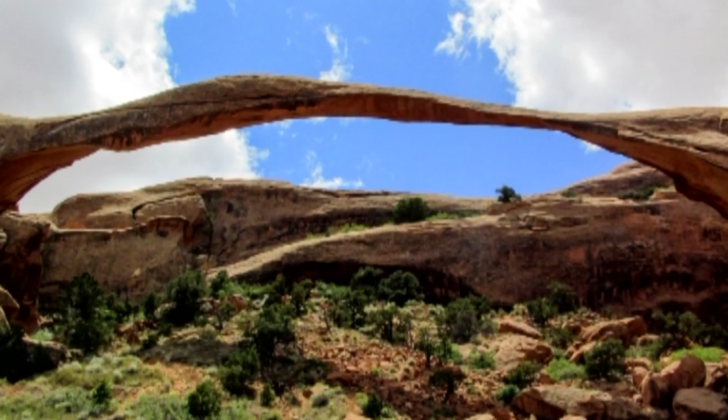From time immemorial, man has been fascinated by structures - structures that floated in his dreams and imagination, patterns that he saw around him, those that he stared at in awestruck wonder when he looked at formations shaped by the forces of nature over the millennia. This fascination inspired him to journey the path of exciting discoveries and challenging innovations, resulting in aesthetic, complex, efficient, yet safe structural forms. Thus, planet Earth was destined to bear on its surface structures that were engineered to perfection.

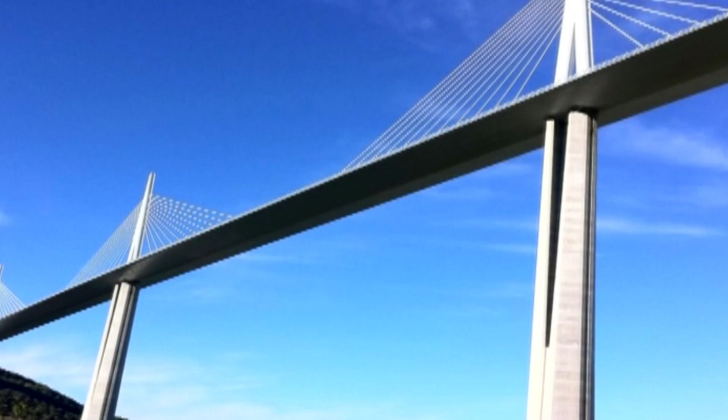The Indus Valley, Sumeria, Babylon, Egypt, Greece, Rome, China - a few of the many places on planet Earth that have given us some of the most magnificent structures. And today, we have breathtaking structures to showcase as a human race that has excelled through this great evolution of thought.

The Council of Scientific and Industrial Research, established by the Government of India in 1942, is an autonomous body that has emerged as the largest research and development organization in the country. It is a network of 38 laboratories and 39 field stations or extension centers throughout the nation. CSIR-Structural Engineering Research Center, Chennai, established on 10th June 1965, is one of the national laboratories under CSIR.

The center is recognized at the national and international level as a leading research institution in the field of structural engineering. The vision of CSIR-SERC is to be a global leader in structural engineering by excelling in research in frontier and cutting-edge areas, and by developing competitive technologies by embracing innovative inter- and transdisciplinary approaches for the benefit of society and industry. The Charter of CSIR-SERC envisages the center to act as a clearinghouse for latest knowledge and expertise.

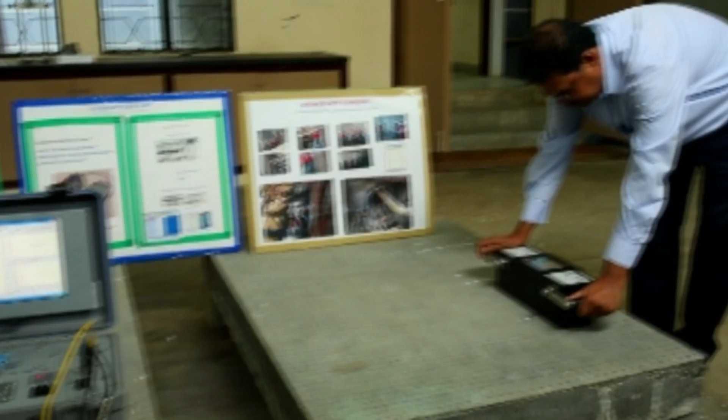The Advanced Concrete Testing and Evaluation Laboratory, ACTEL, has over the years developed expertise in non-destructive testing and evaluation for quality control and condition assessment of concrete and masonry structures.

This is one of the oldest divisions of CSIR-SERC, and for the past 2 to 3 decades, importance has been given to the condition assessment of concrete structures, mostly reinforced concrete structures as well as pre-stressed concrete structures.

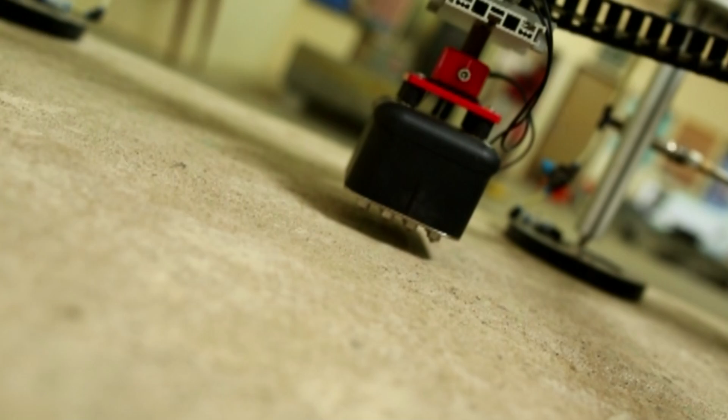Durability studies are conducted on various types and grades of concretes made using mineral and chemical admixtures so as to evaluate their influence on the service life of concrete structures.

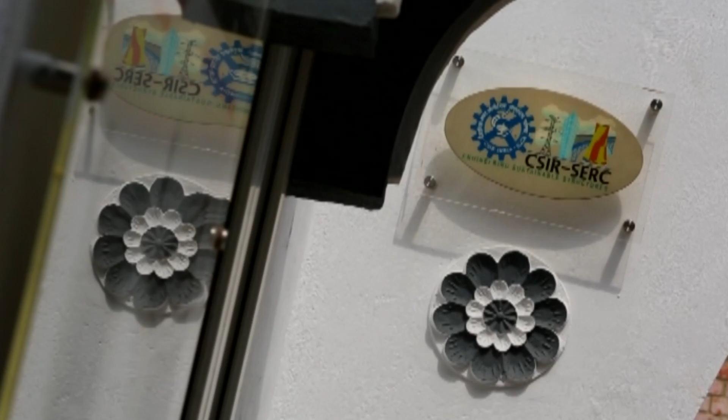It is of little wonder that SERC has succeeded in enabling the construction industry to put up cost-effective structures like they have done in their campus, such as the lightweight EPS model building that can be either a residential or an office space, and model beacon towers such as this one.

Water tanks built with an innovative geometry, saving space and costs. Ferrocement service core units, and fiber reinforced concrete manhole covers.

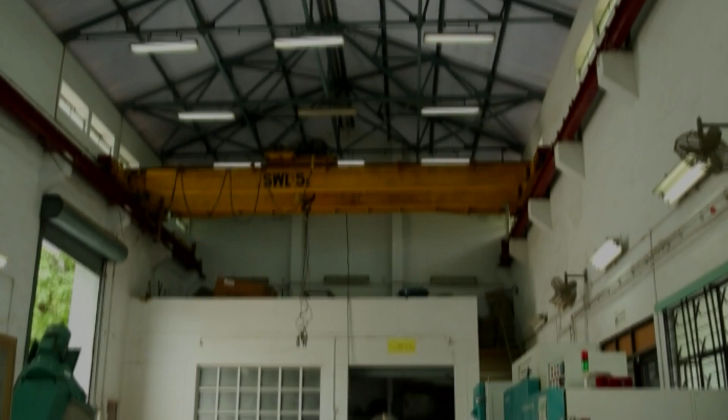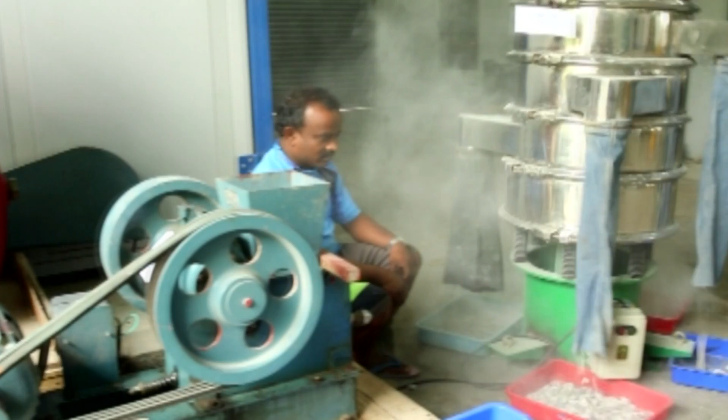This is the Advanced Materials Laboratory, which is carrying out research and R&D activities in the area of construction materials. At present, we are working on alternate binders and aggregate systems, which is required for the sustainable development of infrastructure.

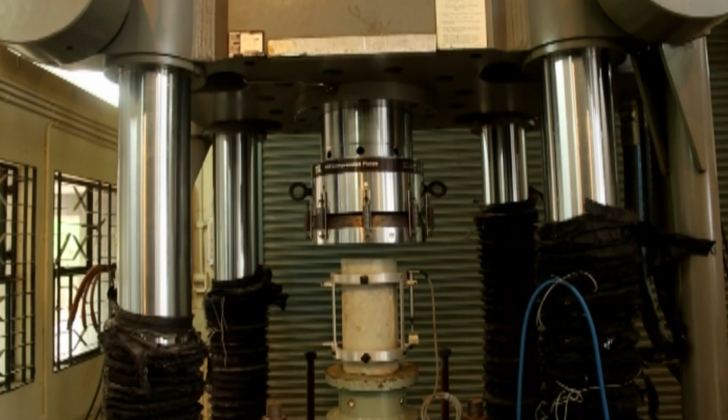Scientists of this laboratory have developed newer construction materials such as ultra-high strength fiber reinforced concrete, high volume fly ash concrete, lightweight concrete, fiber reinforced concrete, geopolymer concrete, foam concrete and self-compacting concrete. R&D is also being carried out for new repair materials and techniques.

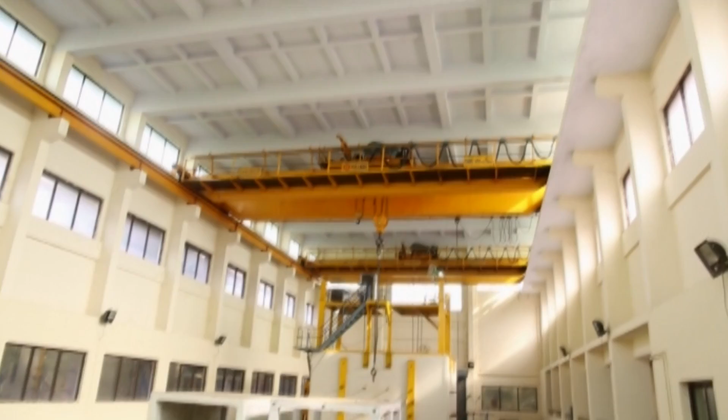The Advanced Seismic Testing and Research Facility, popularly known as the ASTAR Lab, features shake table and pseudodynamic test facilities, the largest in the country.

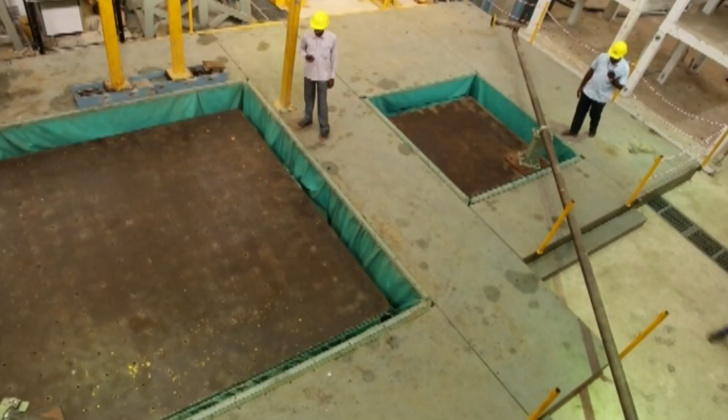In this lab, we try to evaluate the response of structures subjected to earthquake loading. These models of the structures are fixed rigidly to the equipment called the shake table, and real earthquake loading will be applied. Then the response of the structure will tell whether the structure is safe or if any design improvement has to be made.

Many experiments are done in this lab, and some of the experiments are unique and done for the first time in South Asia.

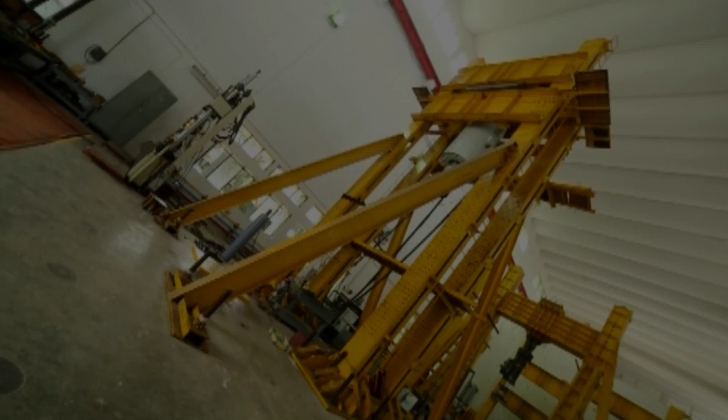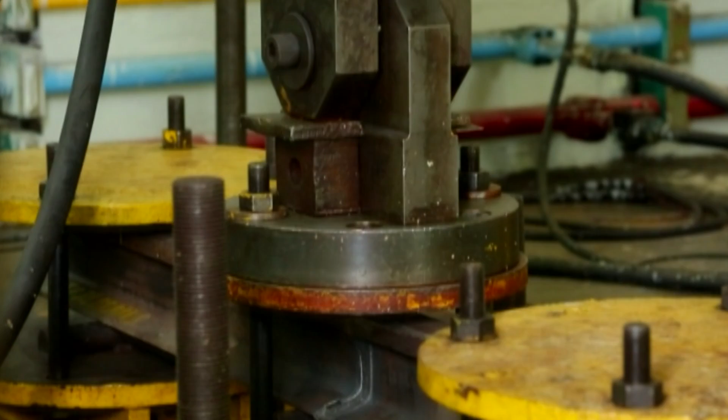The Fatigue and Fracture Laboratory, FFL, features state-of-the-art infrastructure and expertise to study the behavior of structural components and materials when subjected to repetitive loads.

This laboratory was started in 1989, and at that time was called the Fatigue Testing Laboratory. The so-called Fatigue Group was started in CSIR-SERC in July 1983.

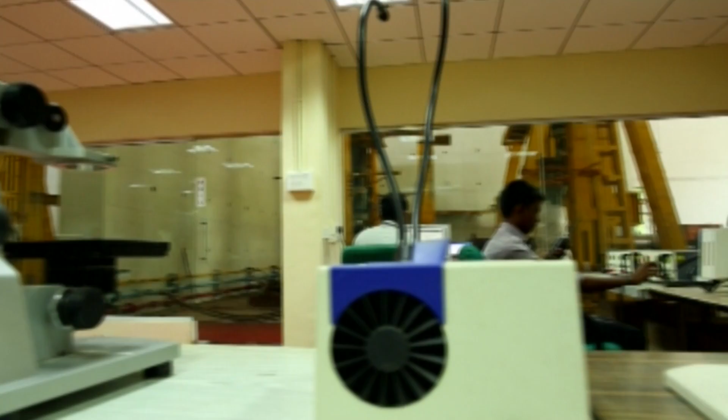The facilities we have can be ranked as one of the best globally for experimental investigations on structural components and materials. Our activities include in-house research and development projects and externally funded projects for the industry in terms of consultancy and sponsored research projects.

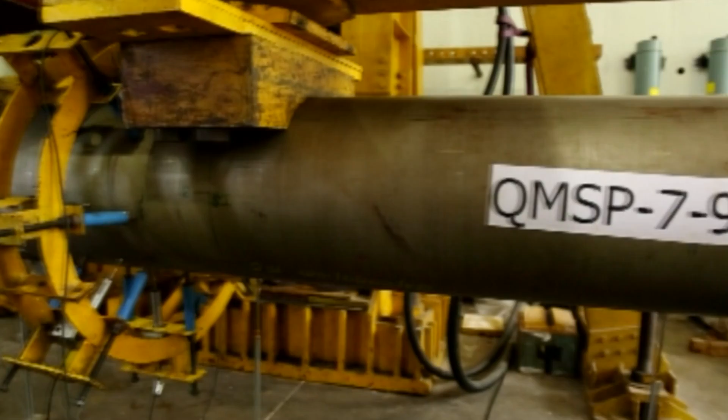Fracture studies under monotonic loading are carried out on weld joints of bimetallic pipes to study the crack growth behavior and failure pattern.

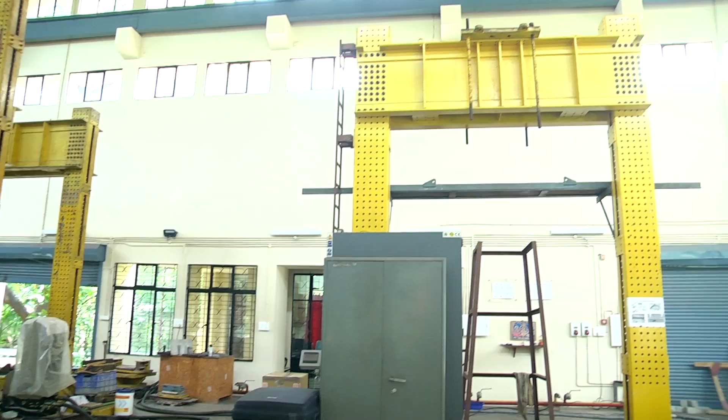In this group, we are working from atomistic modeling using MD simulations, then doing nanomechanics, micromechanics, and then going forward to develop methodologies for structures and to study their performance.

This group is involved intensely in doing analytical, numerical, and also experimental work at different scales. It is basically an interdisciplinary group that takes care of the manifold of structures, mechanics, and sensors.

Here we are using the acoustic emission technique, by which we are also conducting tests using corrosion testing, which is a critical factor for almost all failures in civil engineering structures.

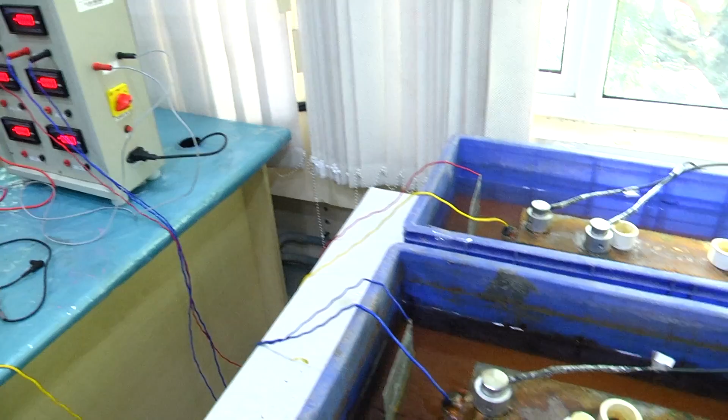This type of corrosion - how it gets initiated and propagated - if you are not able to see it from outside, how we can capture it successfully and appropriately, is done by using the acoustic emission testing carried out in this group.

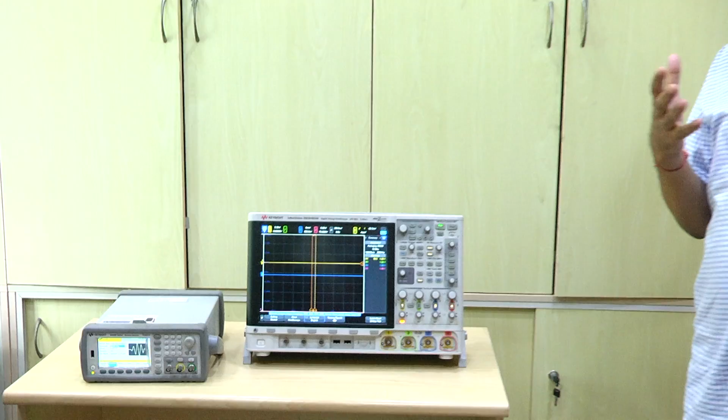Here also we are trying to see how we can employ the ultrasonic technique in a proper way. We are using advanced ultrasonic methods with nonlinear features from those ultrasonic signals, trying to see whether those features can detect the incipient damage occurring inside the structure.

It is a very high sensitivity, low capacity UTM, with a maximum capacity of 2.5 tons, and it is fully fatigue rated.

This research group is also working with state-of-the-art facility using the laser vibrometer, by which we can develop strategies for non-contact SHM of structures. Here we have two different heads for low frequency and high frequency measurements.

The high frequency head can go up to 1 megahertz, so that in a non-contact way we can also try to understand and assess the structural integrity.

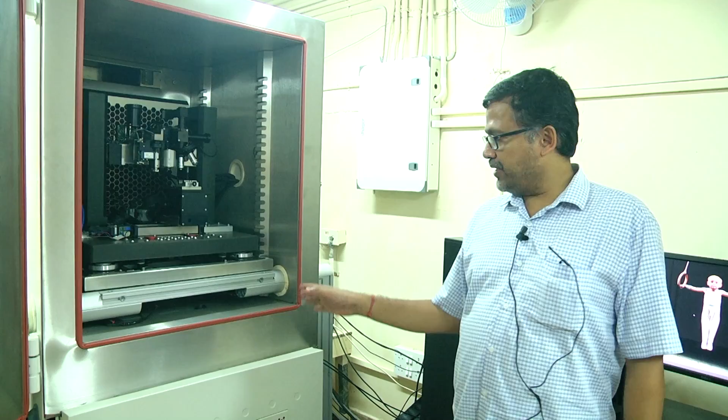This is the environmentally controlled nano and micro indentation facility, where the nano and micro heads have been mounted into the same setup, and we can investigate and experiment on the behavior and properties of different types of material at a very low scale.

By the names of the heads, nano and micro, it shows that we can try to understand the behavior of the material at the nano micro scale.

Here the special interest for civil engineers is that because of the cement based material, the building block is the CSH gel, which is of nano size, and when it scales up, it will give micro size properties.

So the evaluation of those properties during the hydration process under different environmental conditions will give you a new understanding of the subject, to develop, design, and improve the properties of the material accordingly.

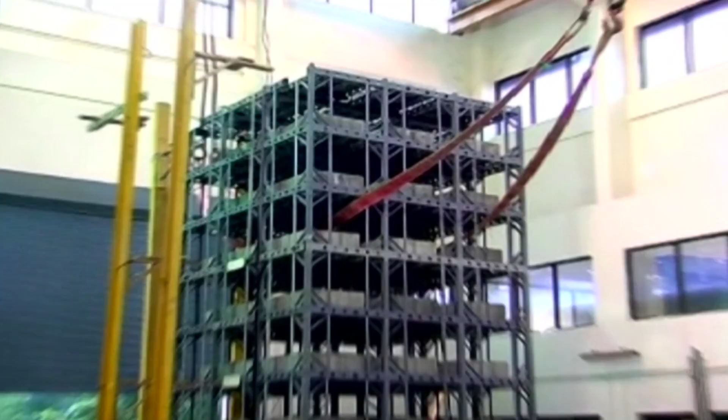A warm welcome to Steel Structures Research Facility. The team of scientists here basically work on analysis, design and testing of steel structural components and structures.

For the first time in the country, we have recently conducted shake table experiments on a scale model of a G+7 multi-storied steel frame building, based on which a prototype 10-storied building was constructed in a record breaking time of 48 hours at Mohali, Chandigarh.

The team of scientists at Steel Structures Research Facility of CSIR-SERC provides innovative solutions to steel manufacturers, power plant and infrastructure industries towards condition assessment, analysis, design and testing of their steel structures and components.

Welcome to Structural Health Monitoring Laboratory. The Structural Health Monitoring Laboratory, earlier known as Experimental Mechanics Laboratory in SERC, is one of the earliest labs established here.

In CSIR-SERC, we have conducted extensive lab level as well as field investigations in order to investigate various structural health monitoring techniques.

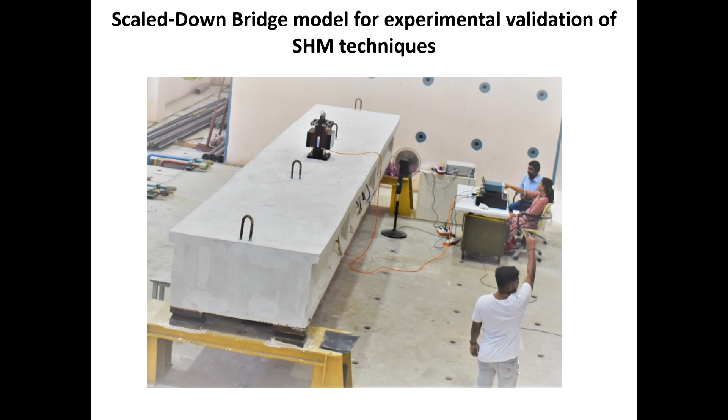We use techniques based on modes, modal analysis, operational modal analysis, experimental modal analysis, time frequency analysis, time series analysis and multivariate analysis. All these techniques have been extensively used in our numerical investigations and the packages developed around for structural health monitoring.

Our laboratory was established more than 2 decades back. We are working on structures which are subject to suddenly applied loads.

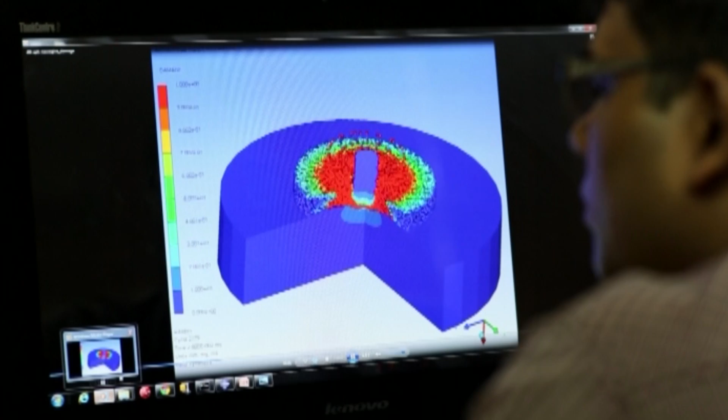For example, during a blast we see the load will be of very high magnitude, and the special structure will be acting in a special way which we have to address.

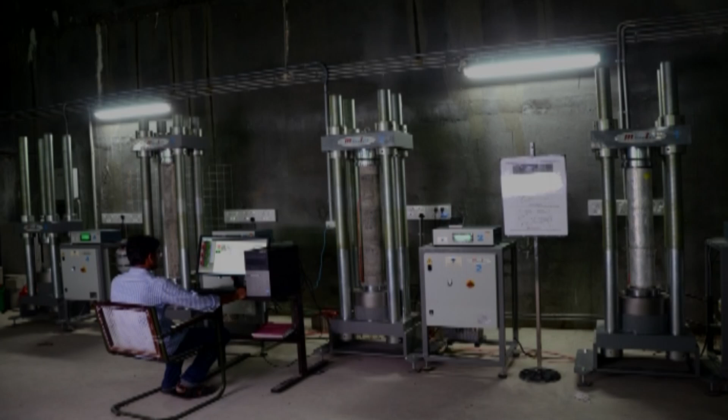Field trials as well as advanced computational tools that run on dedicated, customized software platforms are relied upon to achieve this objective. Recently, efforts are being made to evolve international standards for risk analysis and risk management of structures.

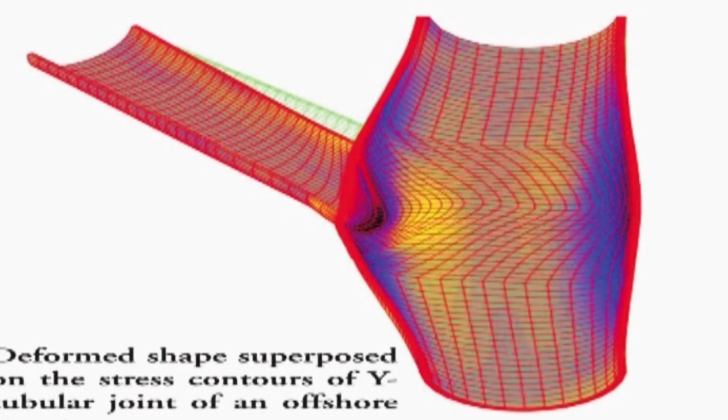The finite element package, FINAR, developed at the center, is being used to provide solutions to many complex engineering problems.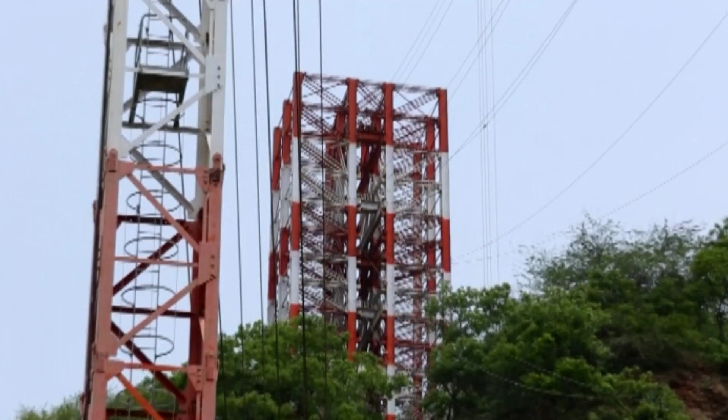The Tower Testing and Research Station, TTRS, a state-of-the-art tower testing facility of CSIR-SERC, situated in Thirusulam, opposite the Chennai International Air Terminal, was established in the year 1984.

Towers and tower-like structures are pillars of our country for transmission of power and telecommunication. In this regard, safe and reliable structures have been designed by SERC, in particular Tower Testing Research Station.

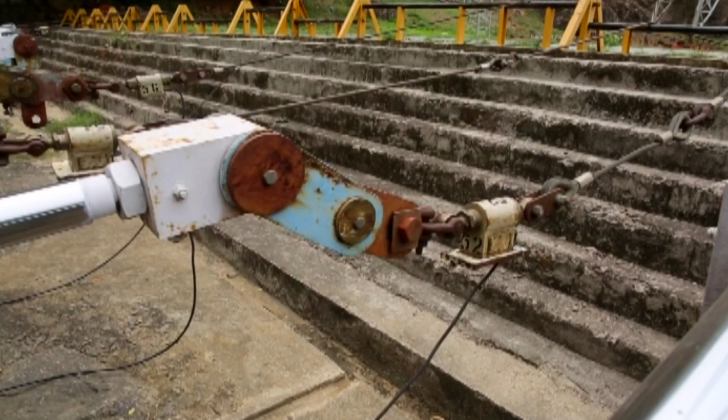This facility has the capability of testing towers up to 80-meter height and a base width of 22.5 meters, and also has a 3-dimensional loading system. In all 3 orthogonal directions, it can apply load up to 1200 tons.

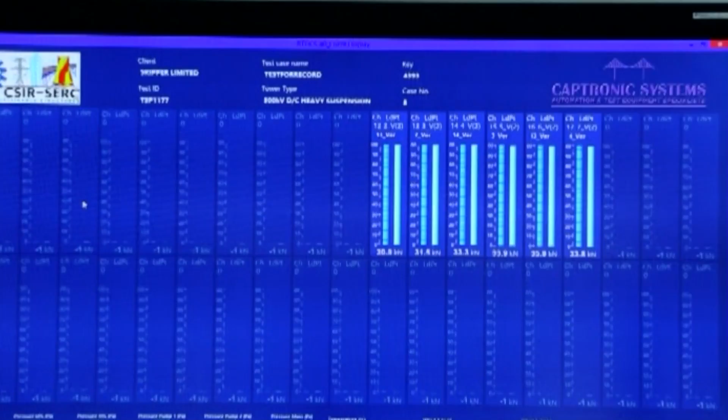Public safety, continuity of service, environmental impact and revenue stability all rely on the reliability of the transmission and communication tower design.

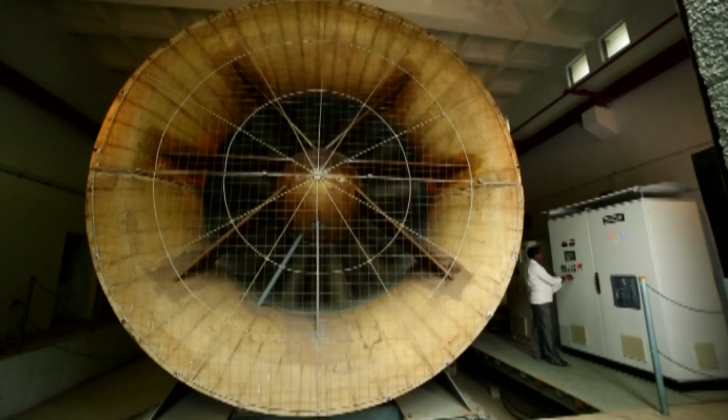India has a long coastline of more than 7,500 kilometers and is prone to an annual frequency of 3 to 4 cyclones. Since the establishment of the boundary layer wind tunnel facility, we have been testing miniature models of many buildings and structures, scaled down from 1:50 to 1:500.

We have a mobile van lab which can be taken to wind energy farms, and then we make measurements at the foundation of wind turbine supporting towers.

Apart from the wind tunnel activities, we have designed cyclone shelters for societal purposes, and 23 such cyclone shelters have been constructed along the coast of Orissa, which withstood the Super Cyclone of 1999 as well as the Phailin Cyclone in the year 2013.

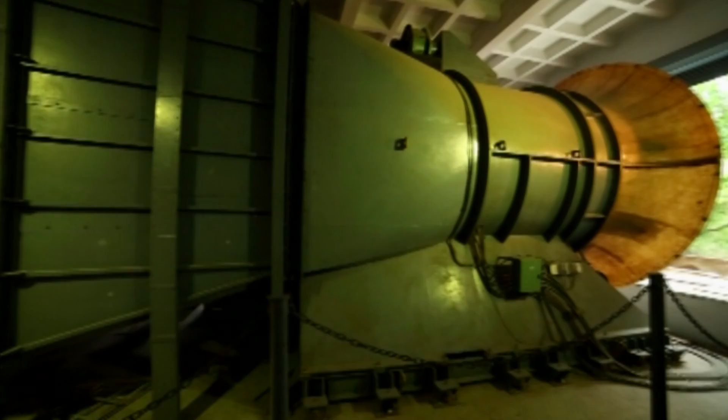By deploying computational fluid dynamics, scientists of the Wind Engineering Laboratory have conducted R&D studies, while also contributing to many Indian standards related to wind loads.

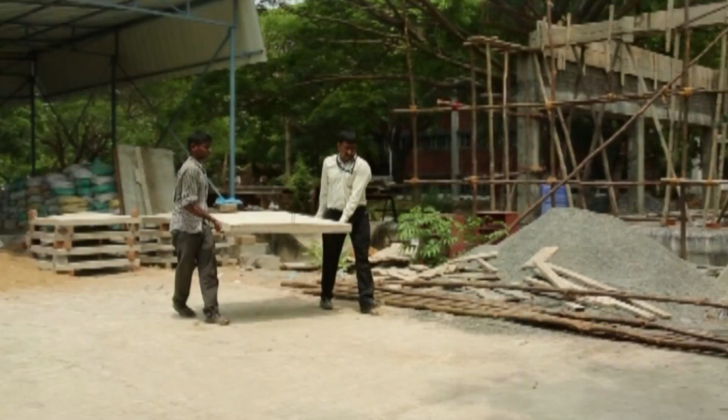The CSIR-800 Program reveals SERC's true societal dimension. CSIR-800 Program is for 800 million underprivileged people; we are developing affordable housing technologies for these people.

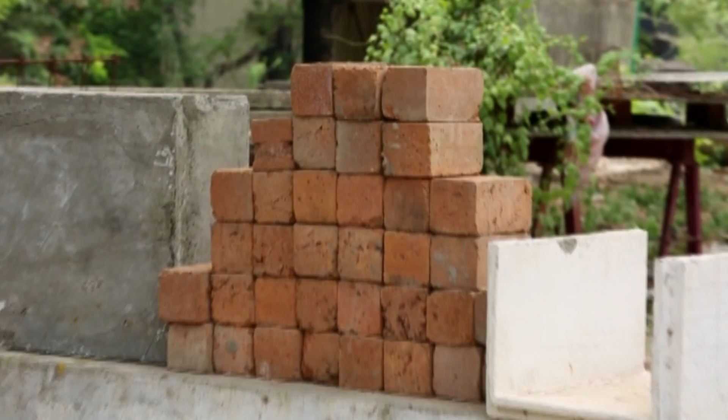The next time around, when we cross a bridge or take the metro or look up at the wonder of a high-rise, let us remember that SERC is right there by our side, firmly behind us and walking with us all the way, leading us all to a glorious tomorrow.